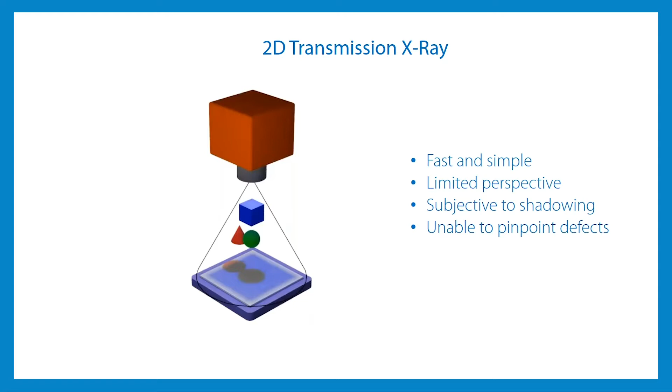Through Omron's CT technology innovations, it became possible to inspect a BGA in a full 3D CT in just a few seconds, not a few minutes. For the first time, the benefits of CT X-ray could be realized in real production environments, and with each new generation of AXI, Omron leads the industry as the largest supplier of advanced 3D CT inspection to the high quality, high reliability market. Briefly, what makes CT different and better than the other traditional X-ray technologies?

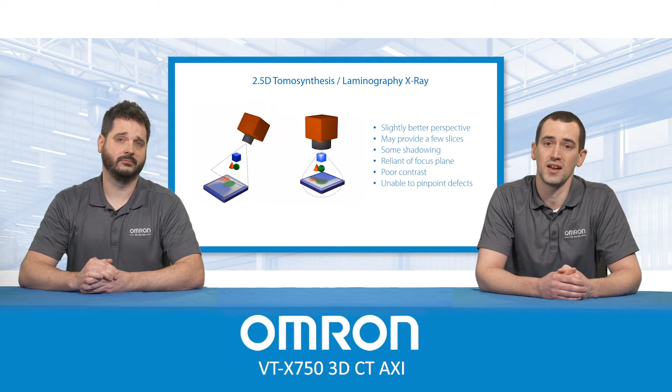We all understand how typical 2D X-ray works. While it is fast, the significant limitations are also well known. Today's more common tomosynthesis laminography-based 2.5D systems may actually collect limited X-ray data similarly from an angle, but a CT system collects far more X-ray data and then uses CT to reconstruct full 3D profiles. The result is X-ray data far richer in detail, producing the highest quality images that can then be used for more advanced, accurate, flexible, and reliable automated inspection.

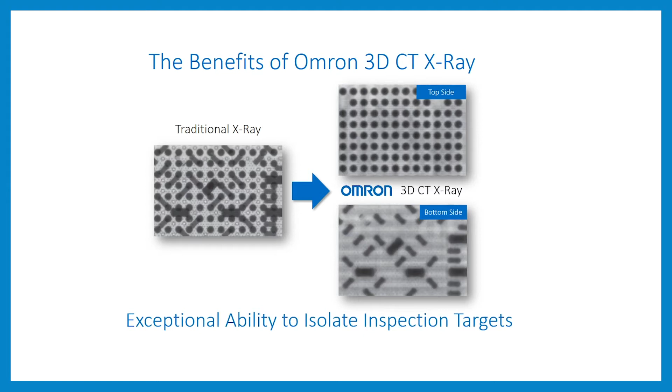Only 3D CT X-ray is able to truly separate PCB surfaces, avoiding interference from opposite side artifacts, mirrored BGAs, or even package-on-package components. This is allowing us to achieve PCB design constraint-free inspection. Which is huge, as assemblies become smaller, more dense, more sophisticated, and include more hidden critical solder joints. Many customers have no control over PCB design and may not know what they'll need to inspect next month. CT X-ray has already become a requirement for many companies and will be soon for most others in order to remain capable and competitive.

Let's talk about Omron's latest 3D CT AXI, the VT-X750 platform. The X750 continues setting the industry standard for automated CT X-ray. We've seen significant, incredibly fast-growing adoption of this technology across a wide variety of different types of customers. Whether used inline or offline, capability remains the same. So let's start by explaining how the X750 works during inspection.

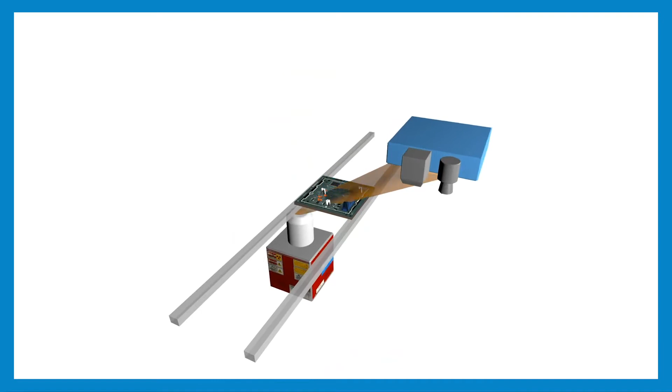Essentially, when a board enters the machine, it's held in place as PCB fiducials are identified using a protected CCD camera. An Omron laser sensor maps the board to automatically compensate for PCB warp. Then, the CT imaging process begins by orbiting the FPD and X-ray source around the PCB in a fast, smooth, and continuous motion. Detailed X-ray data is collected and processed using CT to produce that rich 3D feedback and cross-sectional slices very similar to medical CT imaging technology.

There are many advantages making Omron CT X-ray so popular. Resolution and projection settings are user-definable and can easily be mixed even within the same program. Resolution controls the effective zoom level down to 3 microns, while projections control the amount of X-ray data collected. These settings are key to balancing speed and image quality. It's flexible. Lower settings to support higher speed production use, or increase settings to produce the highest quality images possible for deep analysis or difficult inspection applications.

We collect over 300 individual slices of X-ray data, ensuring the most capable and reliable automated inspection process. These slices provide full 3D understanding of the entire solder joint by performing a virtual cross-section analysis in a non-destructive manner. Omron leads the industry with CT inspection speed as we continue to close the speed gap between CT and traditional AXI technologies. To achieve these speeds, the X750 takes advantage of Omron's own motion control expertise, along with our latest generation of advanced hardware.

Our technology ensures a high-speed, accurate, and stable execution of very critical multi-axis machine movement. Faster speeds also contribute to our lowest CT inspection radiation exposure to critical components, further ensuring that our customers can continue to take advantage of the highest quality inspection CT X-ray offers. The X750 provides fully automated inspection logic for a variety of component types, BGAs obviously being one typical and critical application.

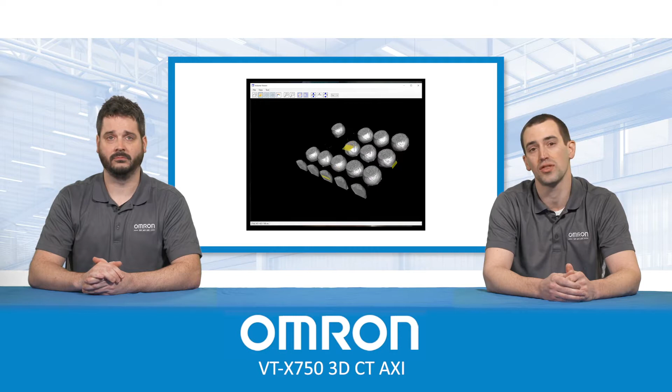To support BGA inspection, Omron has proprietary processes taking complete advantage of those 300 slices of data, ensuring the most accurate and capable inspection while eliminating concerns like component warp. Our robust approach comprehensively measures and tests for the widest variety of solder joint quality and reliability concerns, including 3D void inspection and difficult to detect head and pillow type defects.

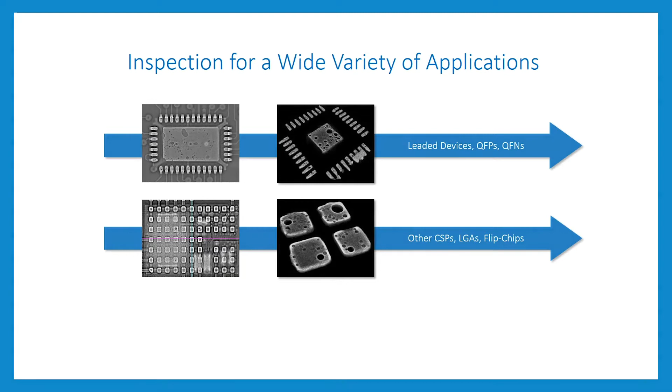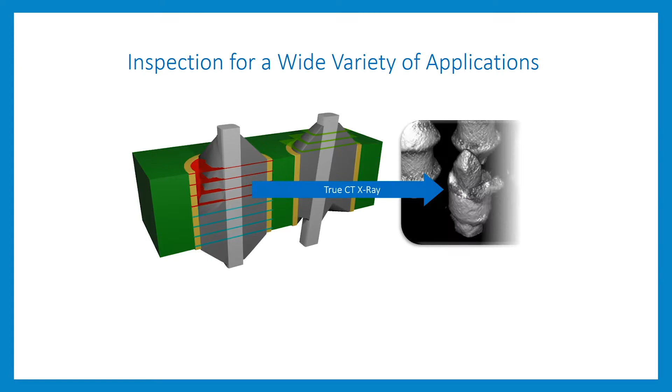X-ray inspection needs are not limited to BGAs, so the X750 includes automated 3D inspection for a full array of SMT components, including QFPs, QFNs, and LGAs. Through-hole inspection continues to be a common X-ray requirement, but only CT is capable of providing true IPC-compliant barrel fill inspection by volume. The X750 also supports press-fit pin inspection applications.

As we envisioned, the impressive capability and image quality of true 3D CT X-ray has made it one of the most important technologies for the future of our industry. Programming and tuning can occur directly at the X750 or work offline using the Omron CTSX programming software. Our process ensures new programs are created easily and made production ready quickly.

We're able to use different data formats and build library components to be reused as new programs are created, further improving programming time. The most common BGA component type utilizes an innovative approach that automatically designs and teaches the part fast with just a few clicks.

Omron is focused on our continued development of new AI tools to further facilitate program creation. AI advancements can automatically tune inspection settings or predict X-ray exposure. These improvements help each step of the teaching process become faster and easier, allowing for less dependency on dedicated, highly skilled resources.

The Omron RVSX offline review software ensures all that advanced imaging and inspection capability is easy to understand and interpret for the operators. The review process is as important as the X-ray system because we hear many complaints around the industry that the feedback and images provided by most AXI systems are not clear enough for the operator to understand and judge results.

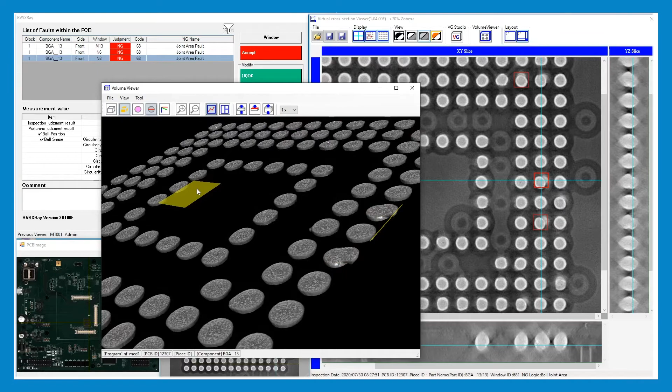RVSX overcomes this challenge by creating a user-friendly experience for the operator that walks them through the review items. Inspection results and measurement data are clearly noted, while interactive images help the operator see potential issues and make well-informed decisions. One of the best features allows the operator to quickly and easily switch to an interactive, fully rendered 3D model of the component that can be fluidly manipulated, zoomed, rotated, and sliced to visualize any desired area.

The X750 is a true CT X-ray system, so this 3D data is always right there waiting to use or share. Of course, the X750 is also compatible with and an important part of Omron's Navi software suite, which has far more features than we could cover quickly, but essentially, it's a powerful tool providing a user-friendly dashboard to monitor and review historical or current inspection result data. Deep dive and trending analysis functions are included, and Navi also helps to quickly create engineering reports.

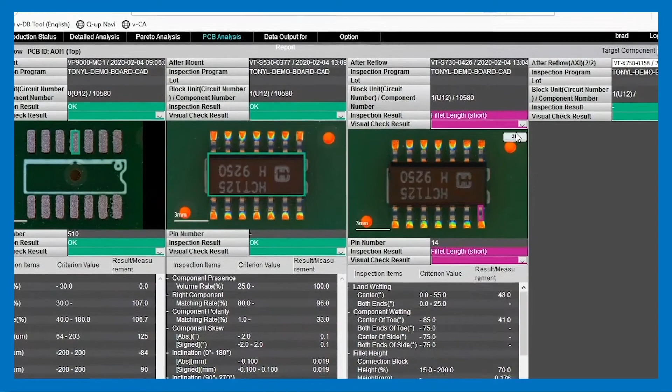As a full solutions provider, one of the most impressive features of Navi is the ability to easily compare process data side by side from SPI, AOI, and X-ray. This allows for true root cause analysis of defects to prevent issues from reoccurring while helping utilize engineering resources more efficiently. Navi provides peace of mind through accountability and easy traceability back to the product at time of inspection.

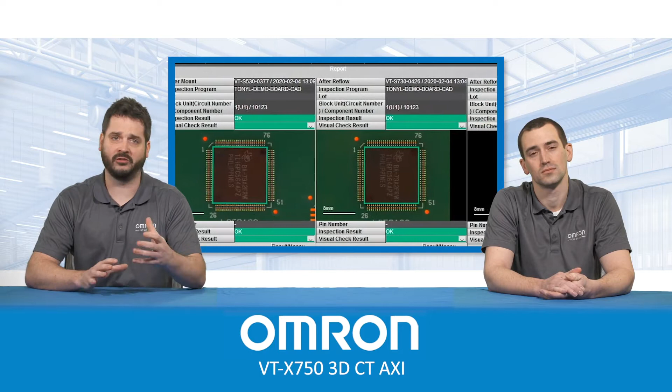But what I like regarding AXI is that root cause analysis. If we find a defect, we can very quickly review the SPI, AOI, and AXI result data in series to look for a correlation, something that we can then address through a process change, a stencil design change, or at the very least, ensure an inspection program is adjusted to identify problems earlier. Exactly. Our goal with Q-up Navi is to help you better understand and access your valuable data, then use it to stop simply inspecting your process and start improving it.

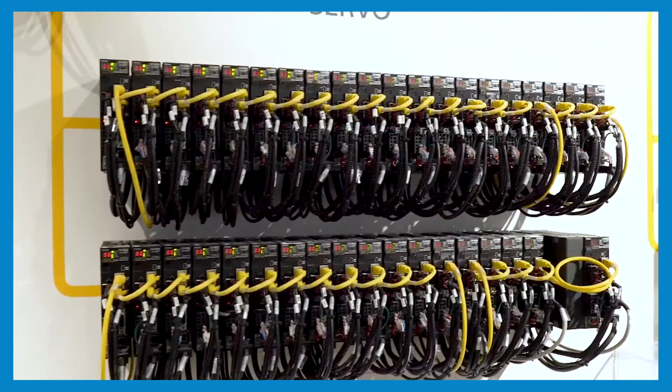Now, we can't talk Omron Smart Factory without remembering that we're an automation company at our core. This special position within our industry makes us uniquely qualified to provide a full range of products and support. Support with simple to advanced custom automation, MES development, or just support with barcode reading, Omron Microscan products offer a full line of handheld or fixed scanners, and we help with easy integration with our inspection equipment. The same vendor is supporting your AXI and your connected barcode readers. No other AXI company provides that level of help.

Omron also has a full line of flexible, mobile, and collaborative robot solutions. If you're trying to improve product or material transportation, introduce a cobot-based solution for simple remedial tasks, or looking for ways to help overcome challenges and dependencies on a limited workforce, Omron is your trusted partner for inspection and automation. So be sure to talk to us about your next projects.

But enough talk, let's go see Omron 3D CT AXI in action. Yes, let's drop in on one of our customers and check how they're doing. I'll see you over there.

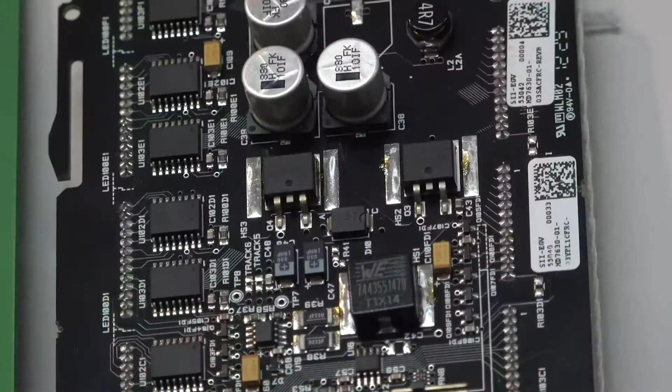Sigmatron International is a global electronics contract manufacturer with facilities in the US, Mexico, China, and Vietnam, serving a broad base of customers with the industrial, consumer, and medical life science markets. Quality is at the forefront of Sigmatron's manufacturing activities. While defect opportunities are eliminated wherever possible and robust process controls are in place, shrinking product footprints continue to drive the need for even more robust inspection tools.

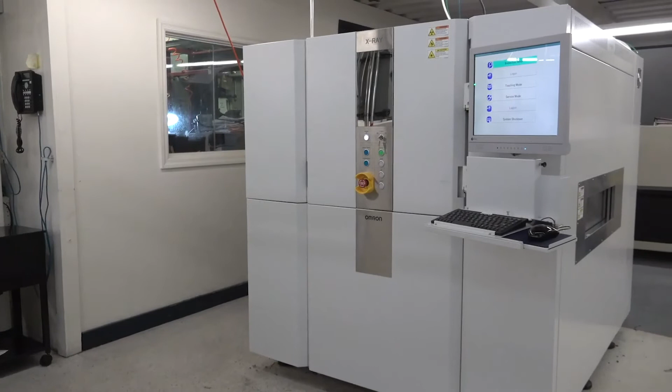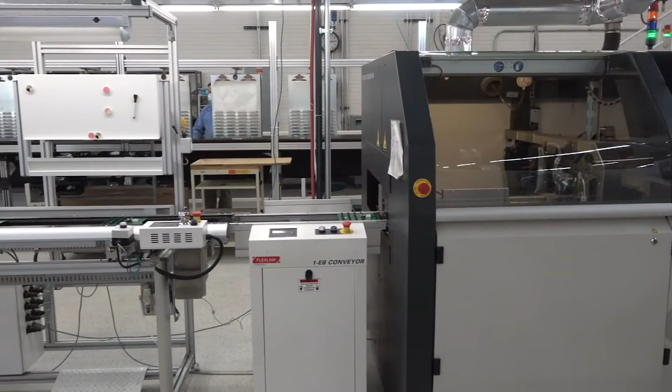The Omron VP-5200 3D solder paste inspection and VT-X750 3D CT X-ray inspection systems are used in Sigmatron's Elk Grove Village, Illinois facility to support tight process control and rapid root cause identification when defects are detected. We are using Omron's 3D CT X-ray system for first article process validation and defect detection for blind lead parts such as BGAs, QFNs, and crystals prior to test.

The X-ray's ability to automatically identify defects within the program-defined inspection area reduces operator interaction and inspection time. We also use the system to identify issues when a PCBA fails test. For example, we had a situation where PCBAs were consistently failing the test, and we could not determine the root cause. We narrowed the most likely suspect to a BGA placed over a via in pad.

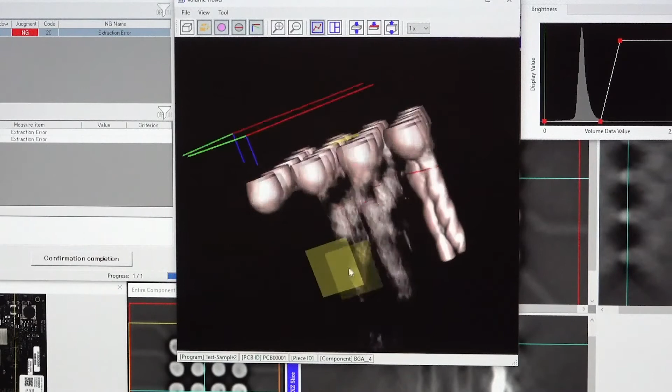When we did 3D modeling using the CT X-ray system, it showed that the PCBA fabrication house had drilled 2 via holes that merged into one under the pad. The system provided an image so clear that it even showed the drill marks. We were able to correct the issue with the PCB fabricator. Without CT X-ray, it is unlikely that the root cause of this issue would have been discovered.

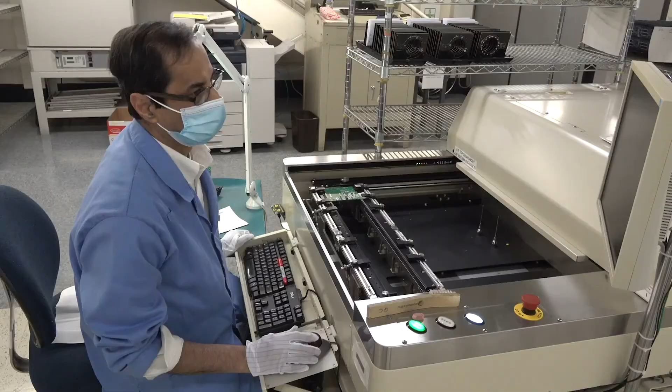Time is money in our industry. Omron systems are helping deliver the superior quality our customers expect very efficiently. Omron also continues to provide us with excellent training and support.

Nick and I are here at Sigmatron, just outside Chicago, Illinois, learning more about their business and the important markets that they serve. We also learn more about how they're harnessing their Omron SPI, AOI, and AXI capabilities to help maintain their high-quality process. Right, but let's focus on the VT-X750 3D CT AXI system.

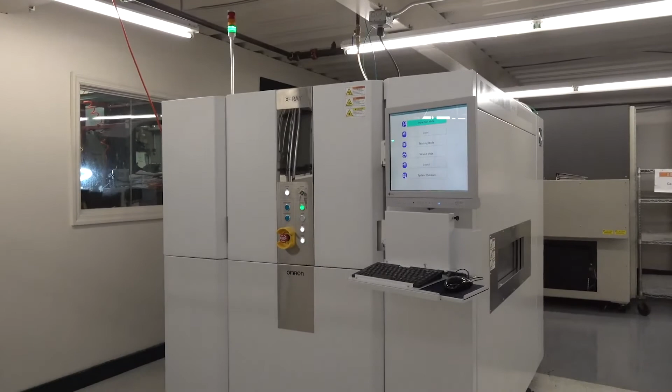The Omron VT-X750 3D CT AXI system provides safe and confident operation with over-engineered lead shielding that provides users with ultimate protection from X-ray radiation exposure. An improved machine design has moved sensitive and critical hardware and devices to an easily accessible rear maintenance cabinet. These components are held outside of the lead shielding to ensure longer-term, stable operation, while also improving troubleshooting and maintenance speed and ease. The sophisticated, multi-axis machine movement is controlled by Omron's latest generation of advanced motion control hardware.

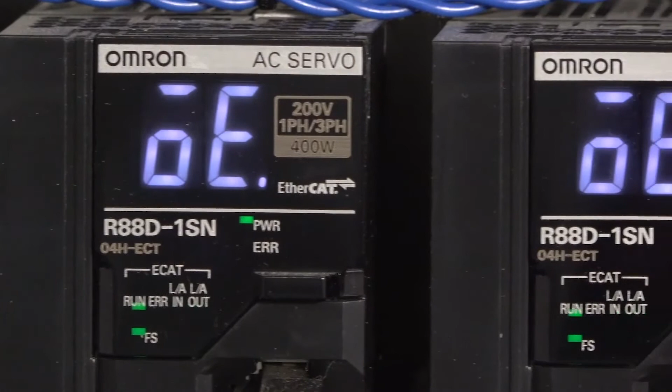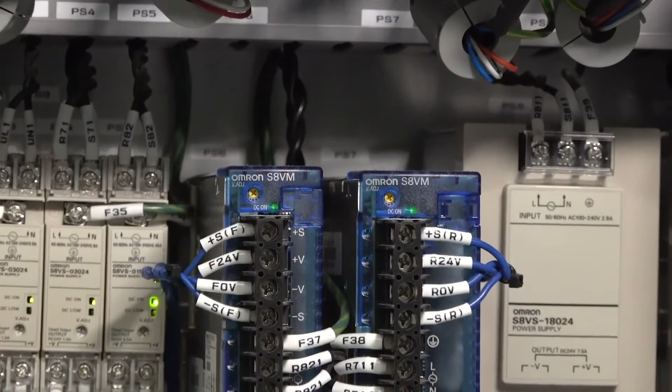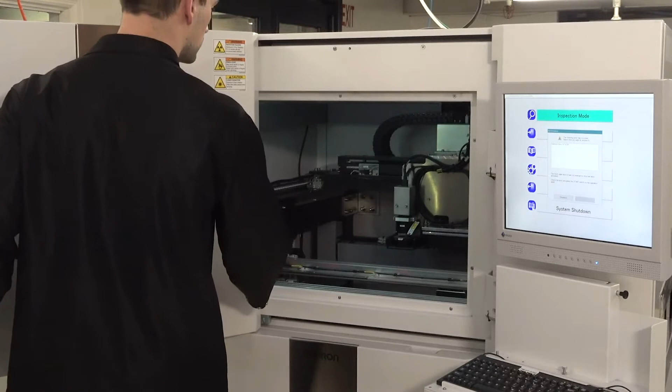Omron light curtain, safety, and sensor devices are extensively used throughout the VT-X750. These high-quality Omron hardware components have a reputation throughout the industrial automation industry for providing reliable operation. When needed, the VT-X750 provides easy front access to the X-ray source and other system hardware. The robust front door is mechanically assisted and provides both a secure, tight closure as well as open access to the FPD, camera, and conveyor components.

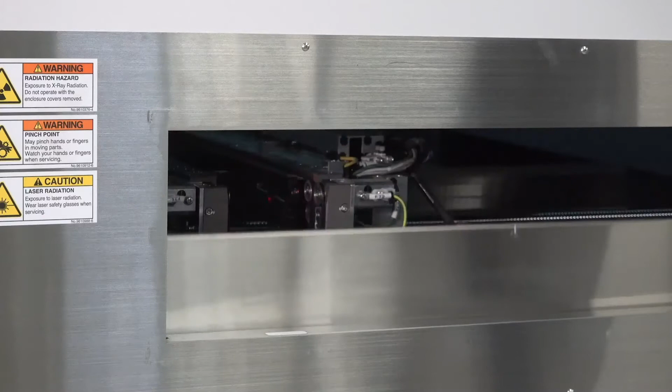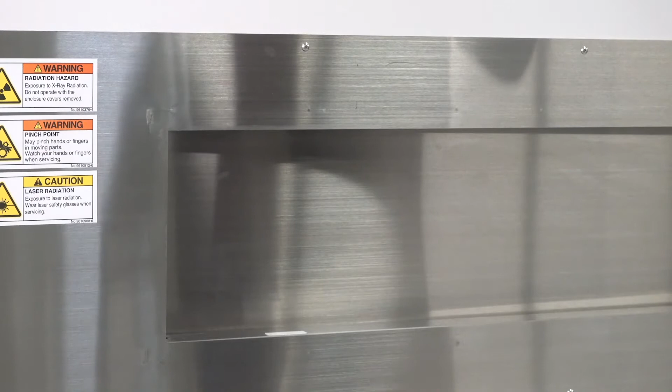The VT-X750 can be used in both inline or offline modes, with flexible operation and PCB handling to support both high-speed production environments or a more detailed lab or audit-based analysis. The PCB side conveyance access utilizes shielded shutters and an innovative board handling system to achieve inline utilization with proper radiation protection. Once the board is inside, inspection can begin.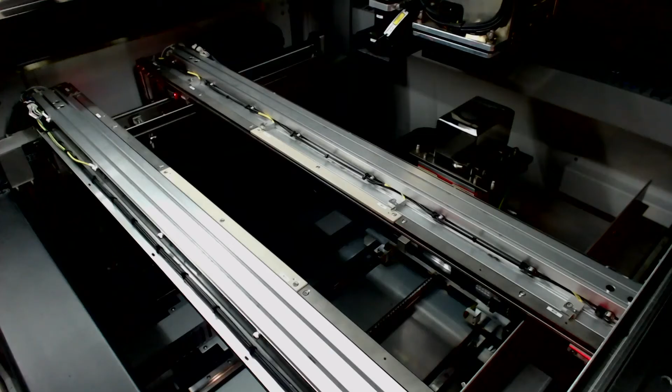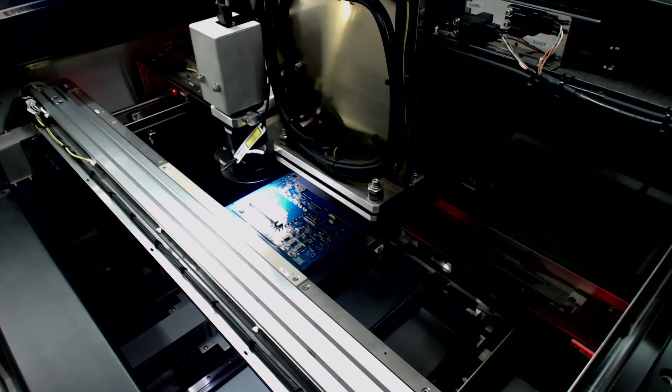But first, the PCB fiducials are automatically identified using a CCD camera that is safely protected by shielding when not in use. Then, the board is quickly mapped by an Omron laser sensor to help automatically identify the board's surface height and help compensate for possible PCB warpage. At this point, the 3D CT X-ray imaging process begins. The FPD and X-ray source orbit around the components in a fast and fluid motion, collecting all the data necessary to provide the rich, full 3D imaging that only CT processing can provide.

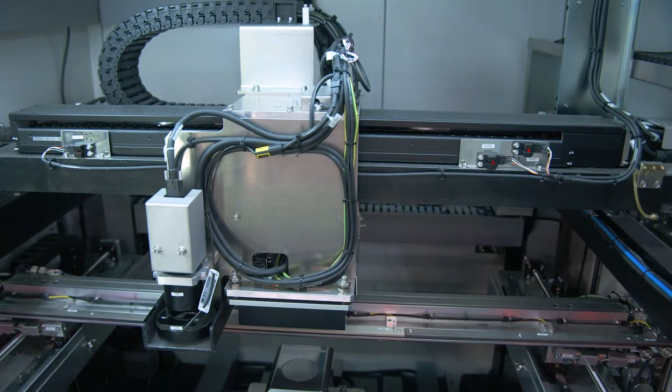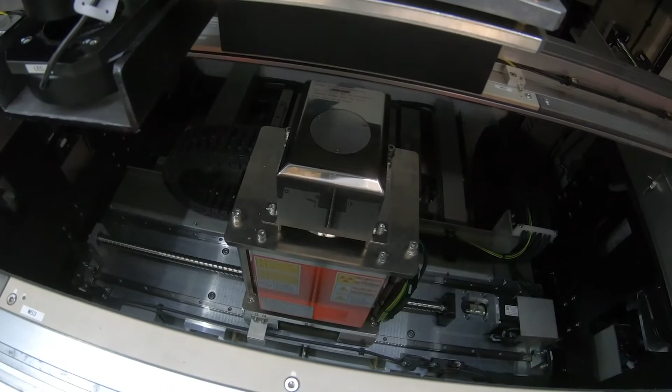The image quality and cycle time are user-controlled by adjusting the resolution, or zoom level, and the amount of X-ray data that is collected to design the best balance for inspection. The flexibility of the X-ray hardware allows for multiple resolution and projection settings to be used within the same program. The variable resolution is selectable from 30 micron to an impressive 3 micron. The projection settings help control image quality. The user can turn the setting down as needed to target a specific cycle time, or turn the setting up to acquire the best X-ray image quality available in the industry to support a more detailed analysis.

This precise motion is only possible through Omron's experience and expertise in automation and control. These advanced capabilities are also allowing the VT-X750 to continue leading the industry with CT inspection speed. The result of this CT imaging process is the absolute best image quality along with an unsurpassed ability to separate and isolate top and bottom components to then apply proprietary automated inspection algorithms that produce the most capable, comprehensive, and stable X-ray inspection process available.

The VT-X750 is also able to achieve larger board handling capabilities with a smaller standard machine footprint by incorporating a multi-stage inspection process. The VT-X750 also comes standard with additional X-ray filtering hardware that reduces the exposure dosage to critical components. Operation is made simple through an intuitive user interface.

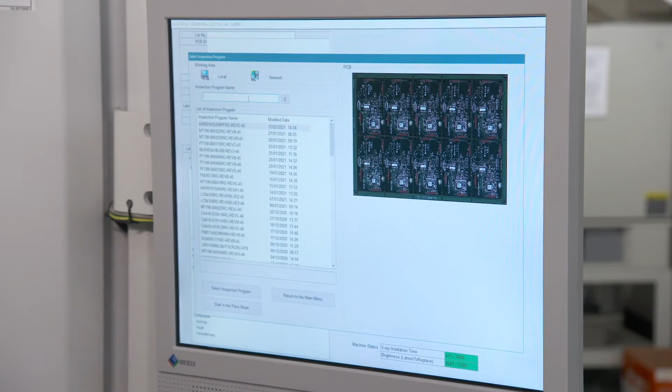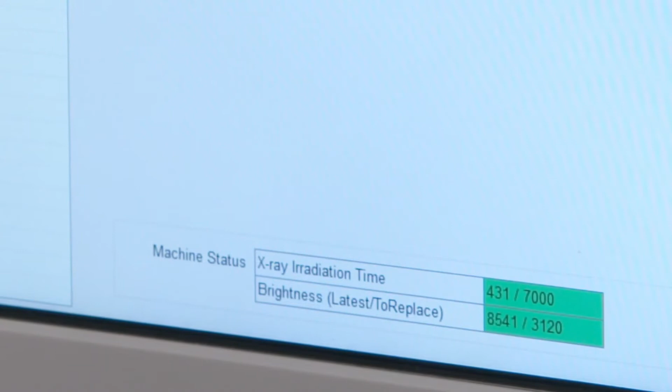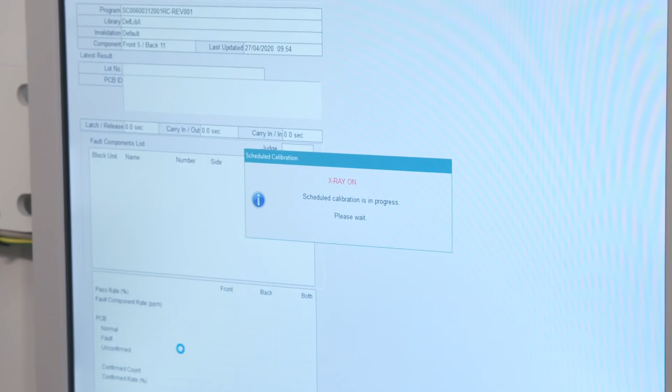Launching programs and running production is very simple, while high-level details about the inspection process are fed back to the operator. The interface provides a constant monitor related to the current status of the critical X-ray source and FPD components, so that system operation remains predictable. The VT-X750 requires very little routine maintenance. Simply keep it clean and lubricated. Even routine calibration processes are handled automatically through scheduled self-calibrations.

While some details are provided to the operator during inspection, the machine is designed to minimize production impacts and resource attention. The detailed inspection review process takes place post-inspection, nearline or offline, using Omron's RVSX software. The RVSX software and operator experience was purposely designed to balance simple usability with comprehensive review tools and image data to create a fast and easy yet high-quality X-ray review process.

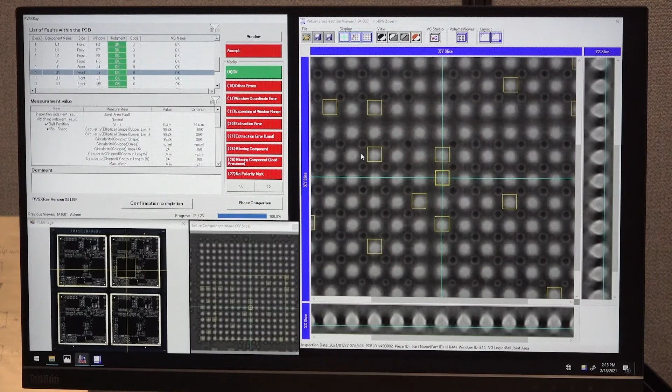Making clear sense of X-ray result data can be challenging for operators, but the RVSX software walks the operator through each necessary review item automatically, ensuring that no checkpoints are missed. Inspection result, criteria, and measurement data is provided alongside a PCB map, a static X-ray image, and a fully interactive, cross-sectional 3D X-ray image that the operator can slice and manipulate to gain a real understanding of the solder joint characteristics. RVSX also provides additional user preference tools and clearly indicates target areas of interest.

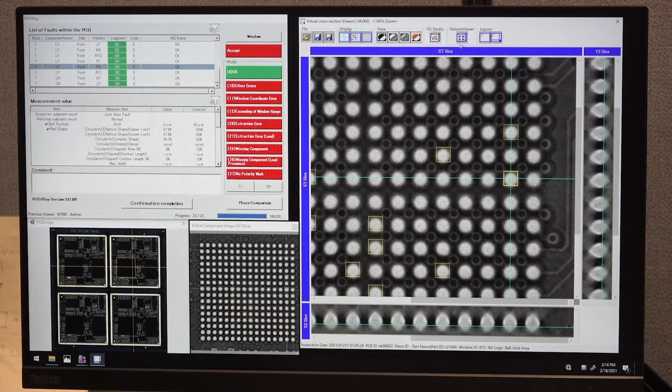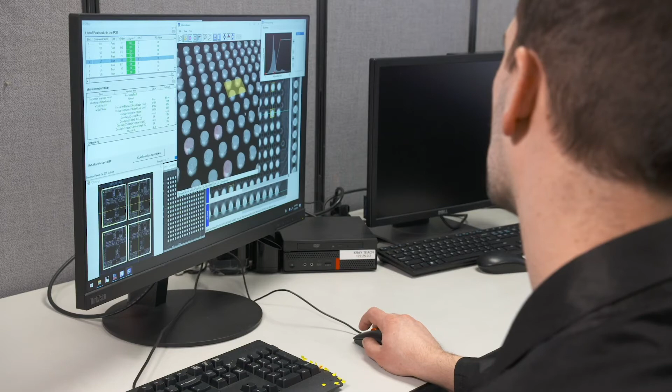When even more detailed or interactive image data may be helpful, RVSX allows the operator to switch to a fully rendered fluid 3D model of any component. This model is also interactive so that the operator can rotate, zoom, or cut the image as desired to isolate any particular section. This type of advanced functionality is only possible through CT X-ray imaging, and because the VT-X750 is a true CT system, this 3D data is always available to the operator. This type of 3D data can be incredibly valuable for internal meetings, pass-down information, or discussions with customers because the image details are very clear and easy to understand.

The various programming and tuning processes can take place at the machine, or these activities can occur offline using the Omron CTSX offline programming software. The specifics of the AXI programming process may vary depending on the scope of the program and parts, but let's review typical BGA programming. BGA programming is fast, easy, and significantly automated. Simply start by choosing BGA from the list of standard component types. Then work your way through the creation wizard.

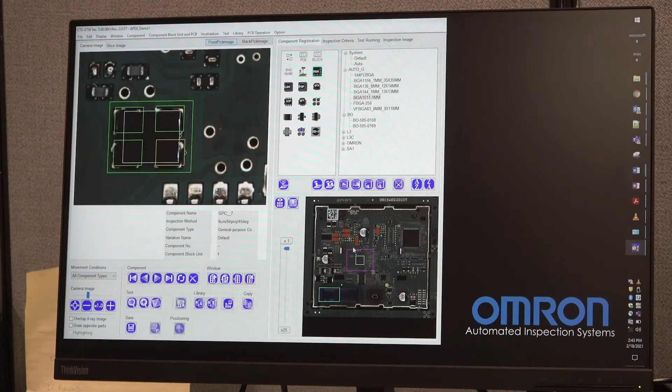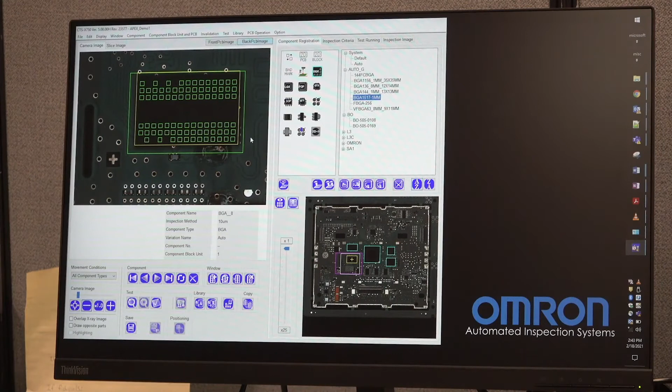Select your target BGA. Identify the lower left corner, then the upper right corner. Input your desired resolution settings and the BGA's orientation. Then click Start. There's no need to enter ball count or pitch because solder balls are located automatically. Once the self-teaching process is finished, the BGA can be further tuned and viewed as needed. Default inspection logic algorithms have already been applied automatically by the software, but the programmer has the ability to adjust criteria, inspection approach, and inspection settings.

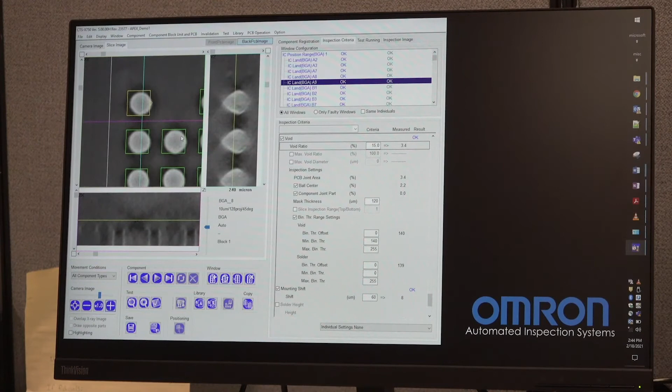At this point, the programmer has access to interactive, full 3D cross-sectional imagery of the BGA, which contains hundreds of slices of rich X-ray data. The programmer can view and manipulate this cross-sectional data however desired to achieve a strong visual understanding of the solder joints. To support the tuning process, data histograms are provided to the programmer to gain valuable insight into the normal, acceptable, and failure point measurement results for the component and your process. This key data is immediately available and can be used to intelligently design the inspection criteria.

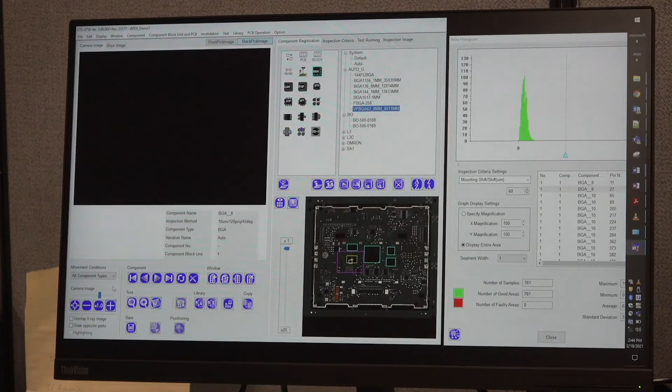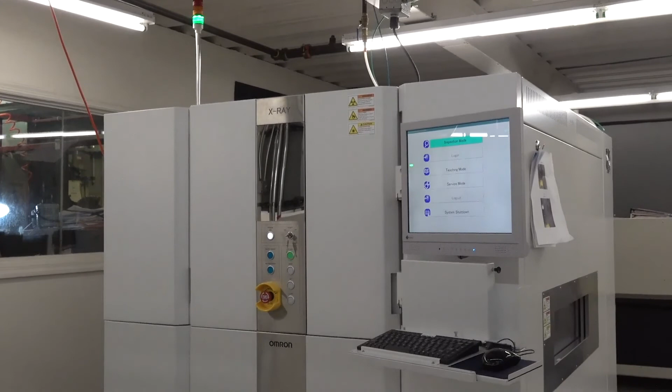As components like this BGA are developed and tuned, they are continually added to a global parts library that can be reused as new programs are created, further improving program development speed over time. The VT-X750 is also compatible with smart factory solutions like Omron's QUP Navi analysis software or the Hermes protocol. We're focused on implementing new levels of AI integration, machine learning, and greater linkage between 3D AOI and AXI. As Omron continues to develop new features and look towards the future, CT X-ray inspection remains one of the most important technologies to achieve the advanced inspection needs of our industry.

Welcome back. It was exciting to go watch the VT-X750 in action at Sigmatron and learn more about their impressive business. They've been a strong partner for Omron for a long time. It's been rewarding to see them growing and introducing our CT AXI and 3D SPI technology into their process, especially as they continue to rely on our RNS AOI and prepare to incorporate 3D AOI next. I love seeing what the future holds for our customers and for Omron.